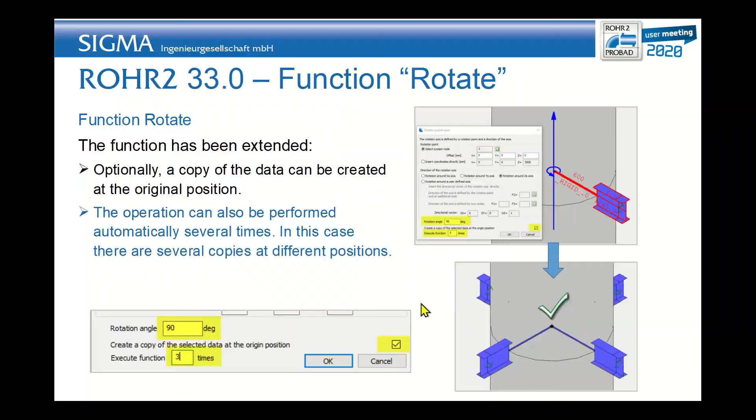In this model I already edited a small trunnion, and the vessel is supposed to have 4 of these trunnions, so I will use the rotate function to copy it. I use select start to end to select the part I want to model, then use the edit rotate function and click on the center node.

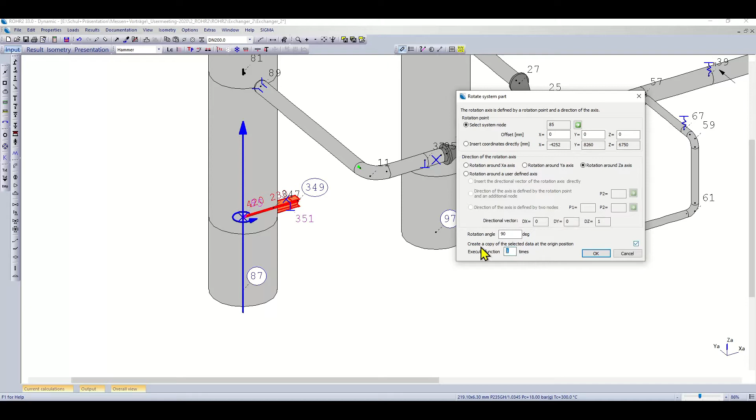Then I specify the angle between 2 copies, which would be 90 degrees, and say I want to create copies. If I take 3 more copies I have my full symmetric system, and I just press OK. Now I just have to remove the boundary condition from the center point, and I have my vessel positioned on the 4 trunnions.

Next I would like to discuss some convenience features in the new version ROHR2 33. First of all, the circle function now allows you to create a circular structure with an angular distribution around a center point with a given radius, and you can also give a gradient to create this spiral kind of helix.

So if you want to, for example, model this as a heat exchanger spiral, then of course you would need to enter some support conditions, and they're usually equally spaced.

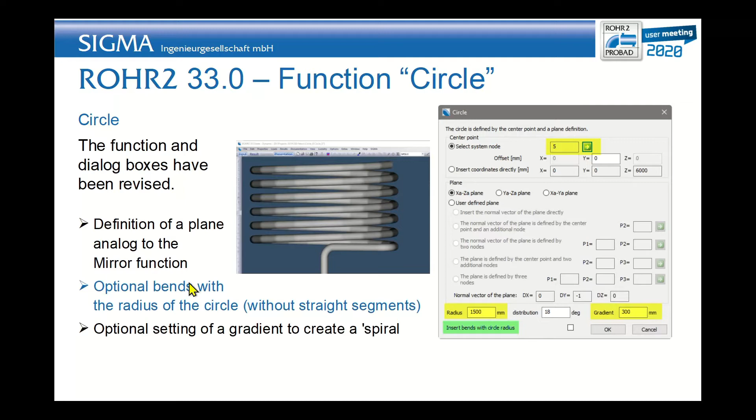So the next feature, the automatic insertion of boundary conditions, can help greatly, because now you can select a line and say you want to create boundary conditions at a given distance. So you say you want every 3,500 millimeters, and you get all 3.5 meters of support of the same type.

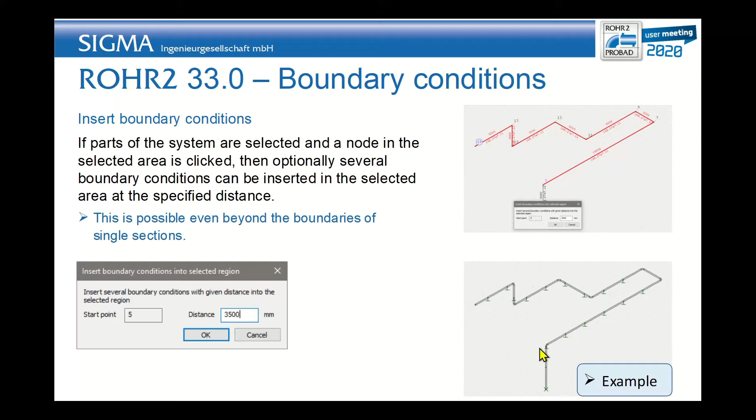Very convenient. On the other hand, if you've created these boundary conditions, you can also delete them. You select the part of the system and then use the function delete boundary condition.

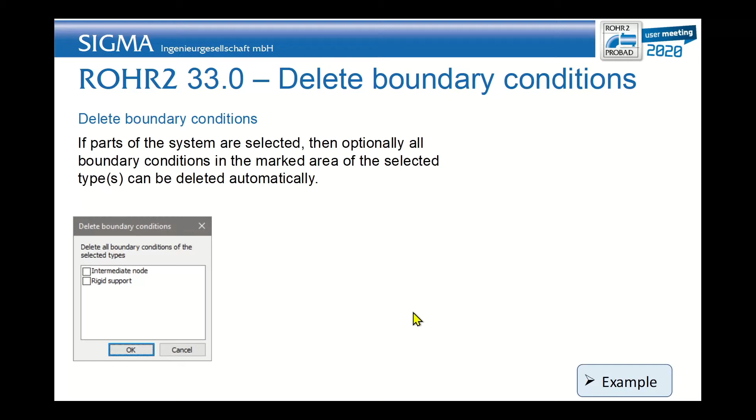So let's start with the circle function. First of all, I will have to select the correct diameter for the pipe, so I use DN40 here. Then I use the edit circle function, click on the center node first, and specify the plane - this would be horizontal plane with a vertical normal axis. Next step is to specify the radius, so I use 500.

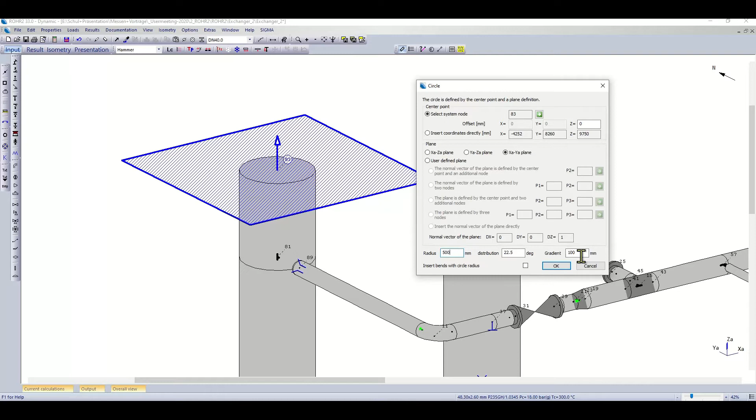The angular distribution is every 22.5 degrees per node, and I also make a gradient, so I get a helix, and I just say OK. Here's my new loop.

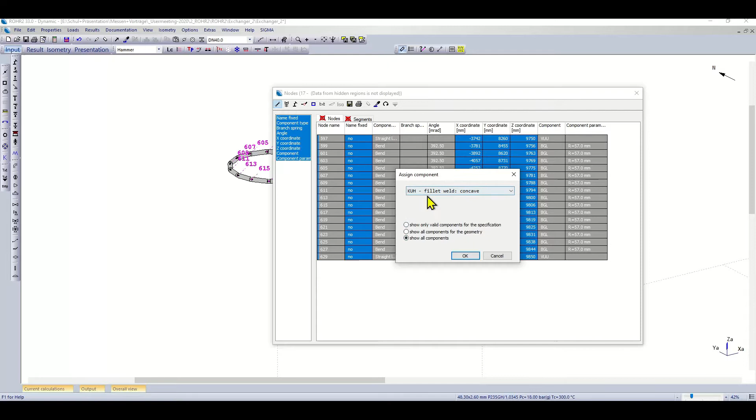Now I select this new line, and I will just hide all the other parts first. I use the list functions to convert all the bend nodes here into just straight line nodes, since I don't want to use the bend function. And now I select my line and copy it many times.

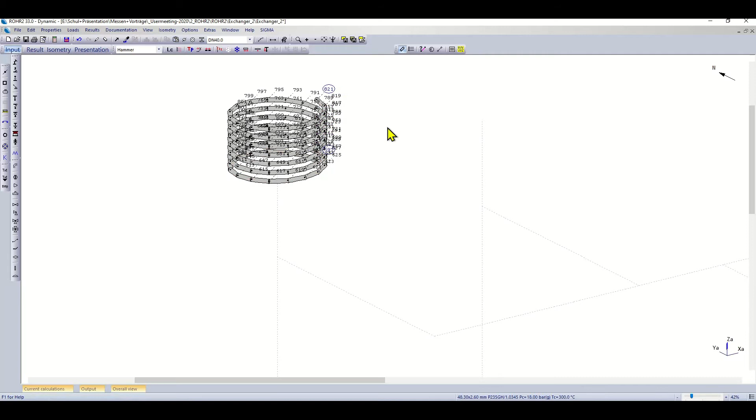So the next step would be to create my support conditions. First of all, I will check what is the good distance. I select from here to here - this would be 90 degrees - and I will use the edit show property of selected segment function to identify the length.

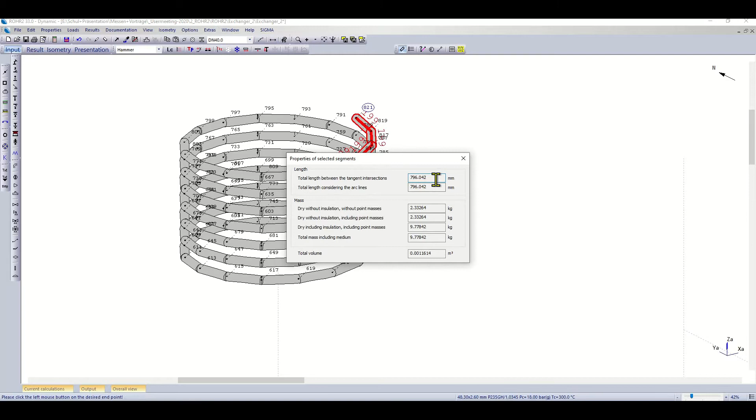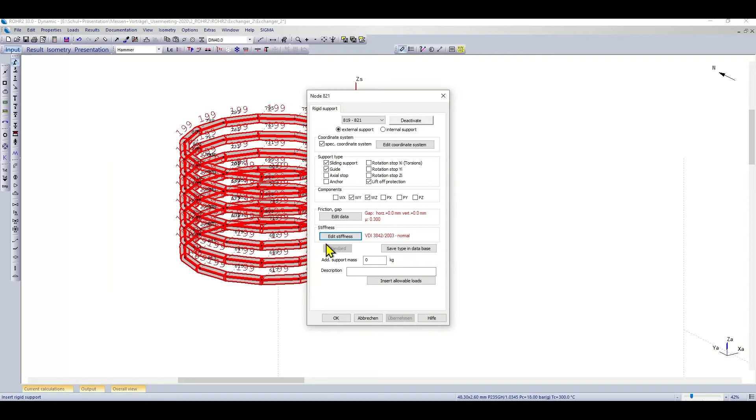I copy it for later use, and now I select all, use the rigid support function, click on the first node, and now I can just give the distance that I just measured and create equally spaced supports. For the support type, I will use slide support with a guide, and you just have to specify some friction and also maybe change the stiffness. So all these supports will have the same function all around the pipe.

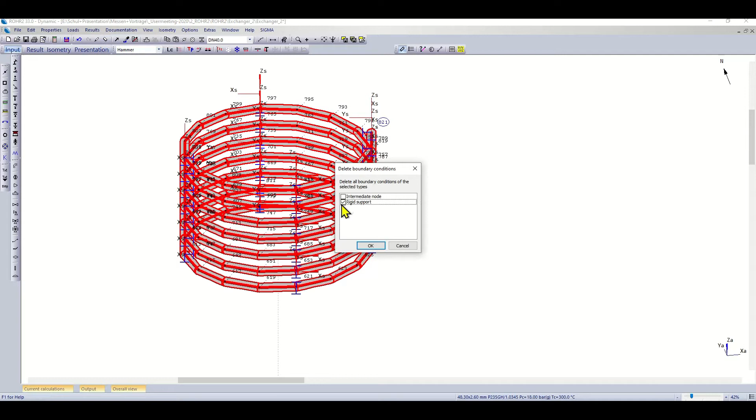So here you can see I've got 4 support regions all at the same distance. And now if I got it wrong, I can still select everything, use the delete function, select boundary condition, choose the rigid supports, and just remove all the supports in one single action.

The next point of my list of new handling functions in ROHR2 33 would be the simplified closing of the gap between two sections.

The intersection point is determined automatically. If you have two segments, you know that they intersect, but you don't know exactly where. You can use the connect segment function, click on those two segments, and they will be prolonged until they intersect. Both sections are prolonged as necessary, and unnecessary nodes are removed.

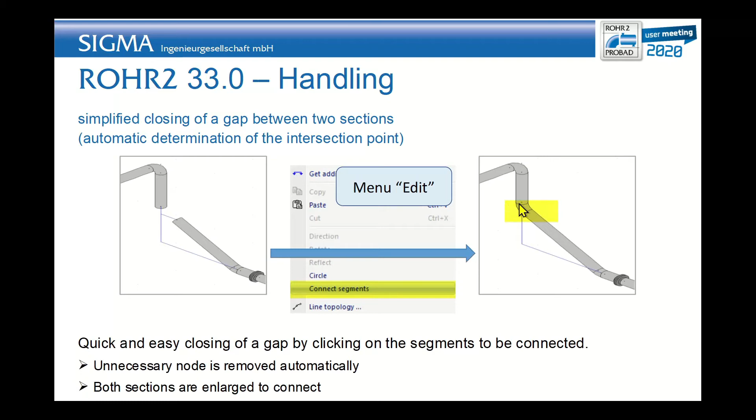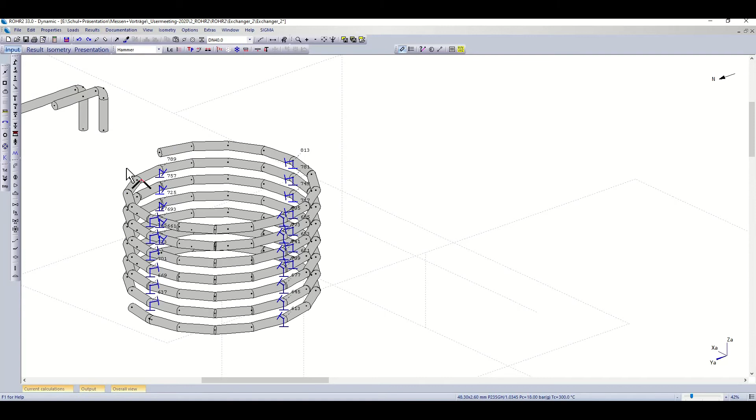Let's continue with our helix and make the connections. I've already drawn the connecting lines, but I don't know where the exact intersection point is. I only know this end should connect to this branch, and this end should connect down here. So I use the edit connect segment function. I click on the first segment to connect and the corresponding second part, and the intersection point is calculated. I repeat it on this segment with this segment, and the connection is done. This works with 90 degree angles, but also with any other angle.

For example, in the next segment here, this is a 45-degree angle. I can just click on the two segments and connect them.

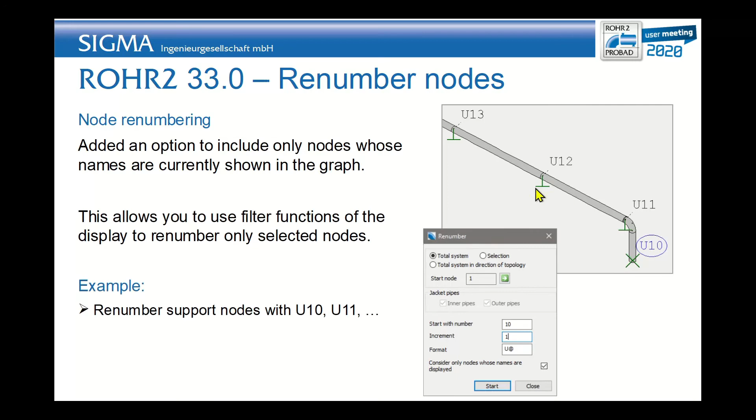In the renumber node function, you now have the additional option to only renumber the nodes that are currently visible. This allows you to give specific names to different branches and still have them in the correct order. Back to our heat exchanger loop, I still have the rest of the system hidden behind here, and now I would like to renumber this loop.

First I use edit renumber nodes. I say I want to consider only the node names displayed here. I choose to number them starting from 1 with an increment of 1, but the node numbers should start with a letter E in front of the number. Now I click on the start node, indicate it as the start node, and say go. Now I've got a nice numbering from E1 to E116.

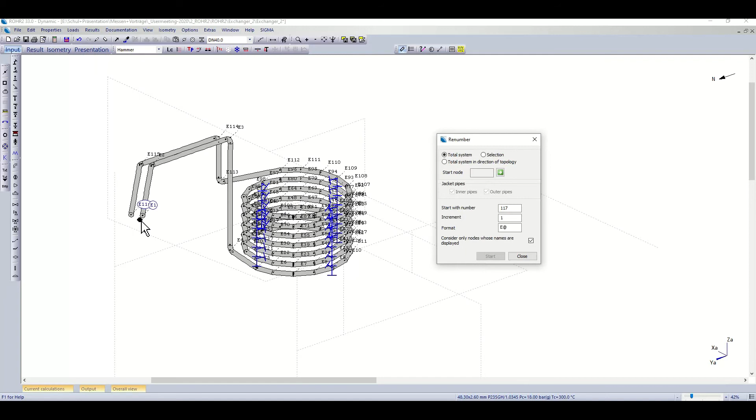Now if I bring back the other segments and show all segments, I can see that my previous numbering has not been affected, and I still have my E numbers up here.

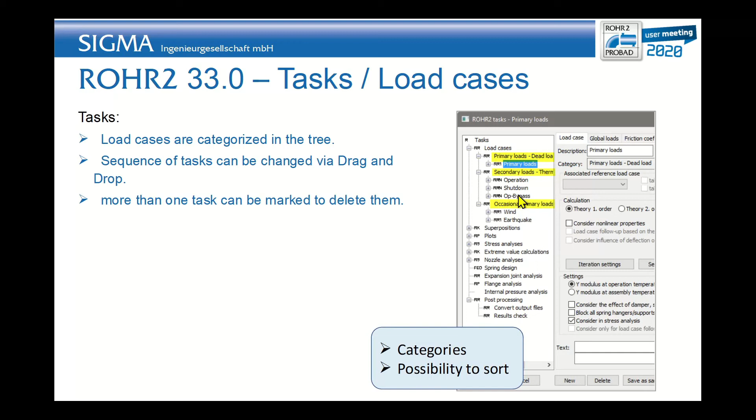In the load case dialog, we now have the load cases organized with categories. The primary load category, secondary load category, and occasional load cases are all now in subcategories. Also, you can now order the load cases after creating them just by dragging and dropping, which allows you to give them a certain order to more easily find your way among many load cases. You can also select more than one load case and delete a package of them with one single click.

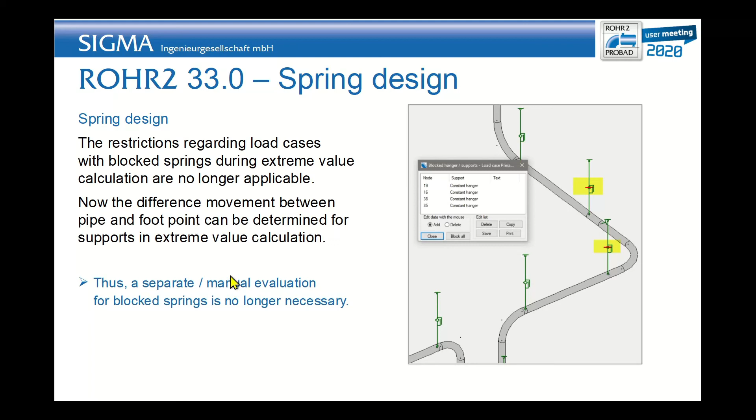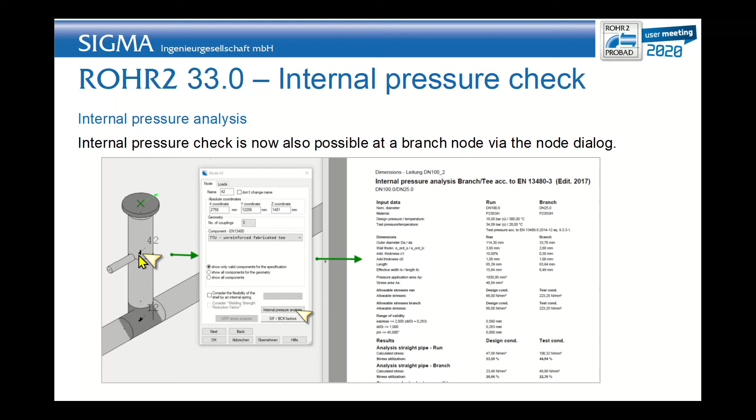Concerning spring design, there used to be a limitation: if you block springs in some load cases, you could not include them in the same extreme value calculation together with a blocked and unblocked situation, meaning you usually had to do two evaluations. This limitation is no longer necessary. Also, if you've created a branch by drawing two lines together, you now have direct access to the internal pressure analysis of this artificially created T, without needing to use the T function in ROHR2.

In the load case dialog, you can see the categories here now, and also the different load cases, which you can select, move down or up, to sort your order. You can also select many load cases and delete them all with one click.

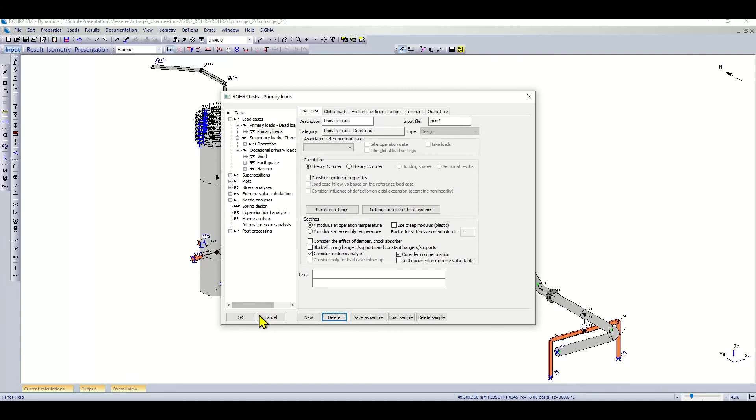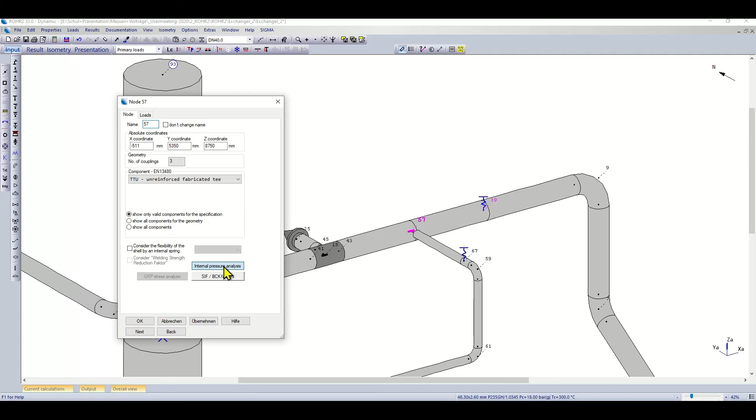Concerning internal pressure analysis, you know you can click on the component, select the T, and do the internal pressure analysis. But now it's also possible to use this function on a T that was created just by drawing two lines, a simple branch connection. I have access to the internal pressure analysis and can bring up the internal pressure design for this component to check that the T is okay.